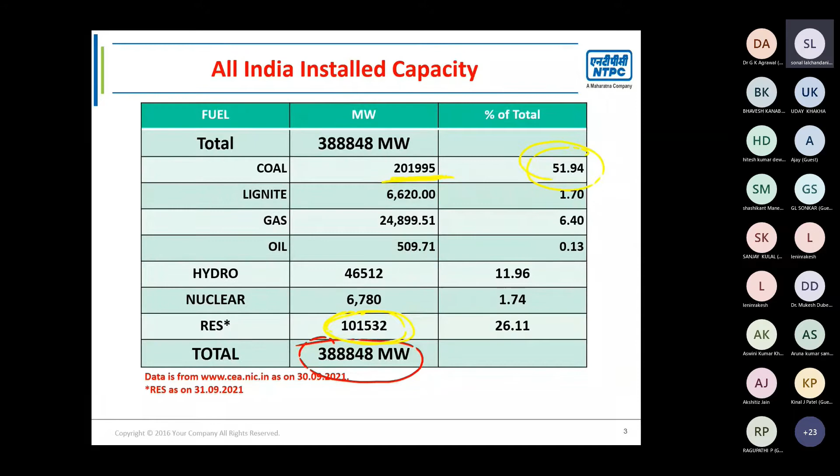And with the government of India giving emphasis on renewable energy, renewable is around 1 lakh megawatt. Jo main aapse bol raha tha that India is a rich state in terms of electricity, so our installed capacity is very very big, out of which our renewable is 1 lakh megawatt, which includes solar and wind.

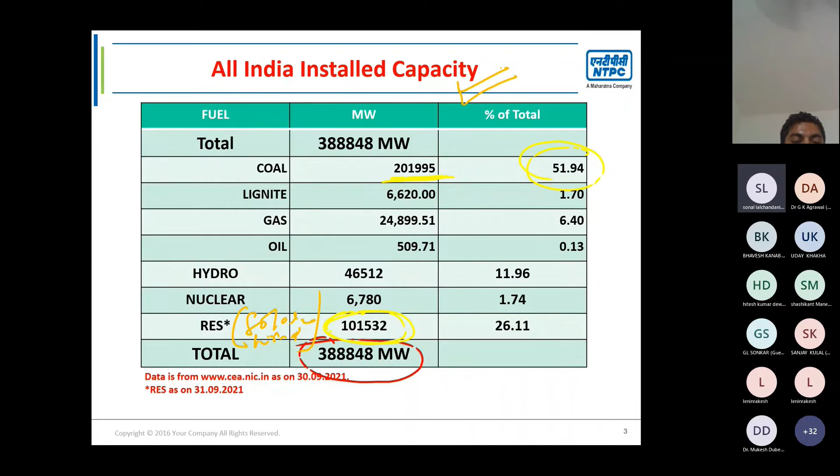It's usually a session of full day that we conduct, but I need to wind up in 2 hours, so I'll move fast. This is our renewable energy source share. Maine jaise aapko bataya that we have 1 lakh megawatt of total renewable, which includes wind, solar. Major is wind and solar. Wind aur solar major hai.

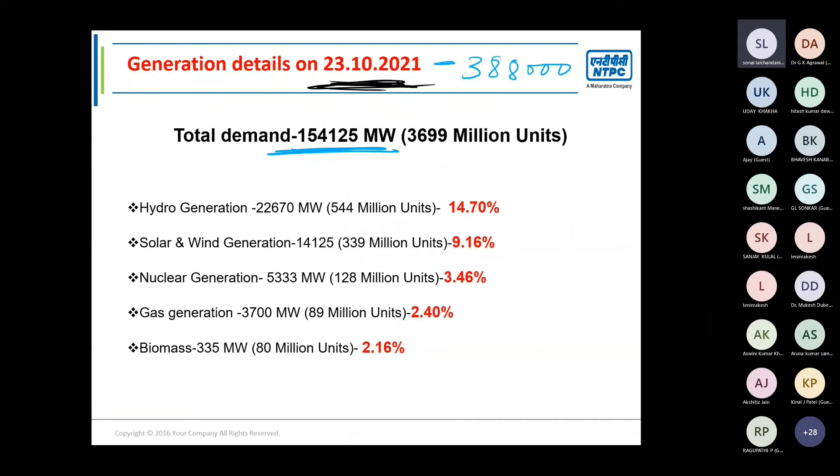Yes, sir. Am I audible? Yes, sir. 1 lakh. Yes, sir. We are using like 50% of the capacity.

So it has touched the maximum it has touched in history, which is 2 lakh. Not even 2 lakh, around 1,95,000. I am just assuming 2 lakh in the month of June.

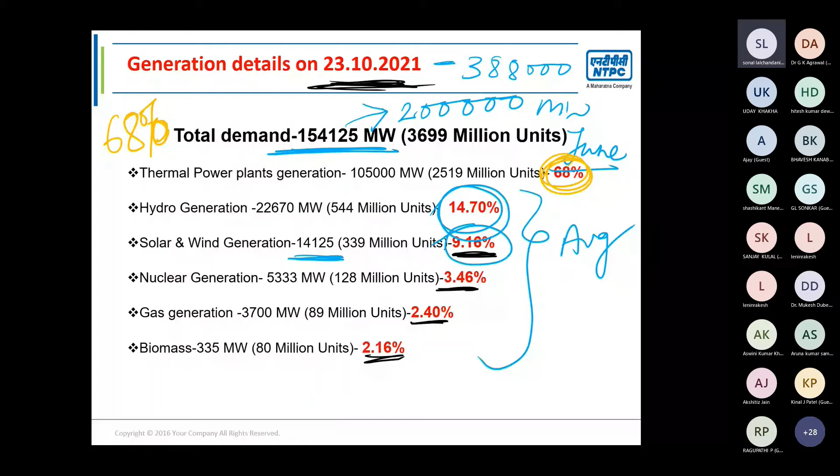देखिए मेरी जो यूनिट्स हैं, आज से 10 साल पहले या 50 साल पहले जब भारत आजादी के बाद सोचा कि हमें अपनी बिजली बनानी है, तो एनटीपीसी का जन्म हुआ। 1965 में रशिया से एनटीपीसी में टरबाइन आया, बदरपुर प्लांट की स्थापना हुई। So India started its own electricity production.

जब बिजली बनाने लगे तो जो थर्मल पावर प्लांट्स थे, they were supplying 100% of load, because the RE concept was not there. But as the transition is there from thermal to solar, जो मेरी यूनिट्स डिजाइन हैं, they were designed to operate at full load.

But now based on grid requirement, अब ग्रिड क्या है? ग्रिड जो मैंने आपको बताया RLDC, अब वो generating station को command देगा कि भैया आपको कितने मिनिमम लोड पे चलानी है।

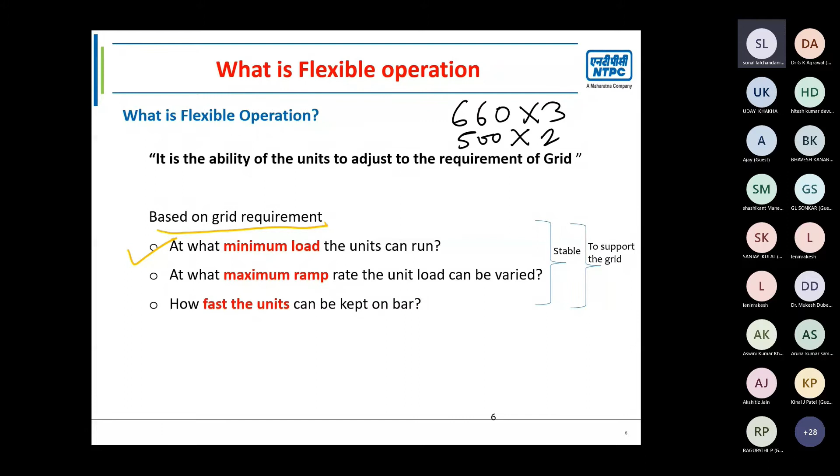बिग क्वेश्चन फॉर मी - मेरी 660 मेगावाट की यूनिट, मैंने बताया 5 यूनिट हैं, 660 की 3 हैं, 500 की 2 हैं, तो total is 2980। अब मुझे बोला गया कि मेरी जो 660 की यूनिट है, उसे फुल लोड पे नहीं चाहिए। क्यों नहीं चाहिए, आगे बताऊंगा। किस रेट पे, at what maximum rate I can make my load vary।

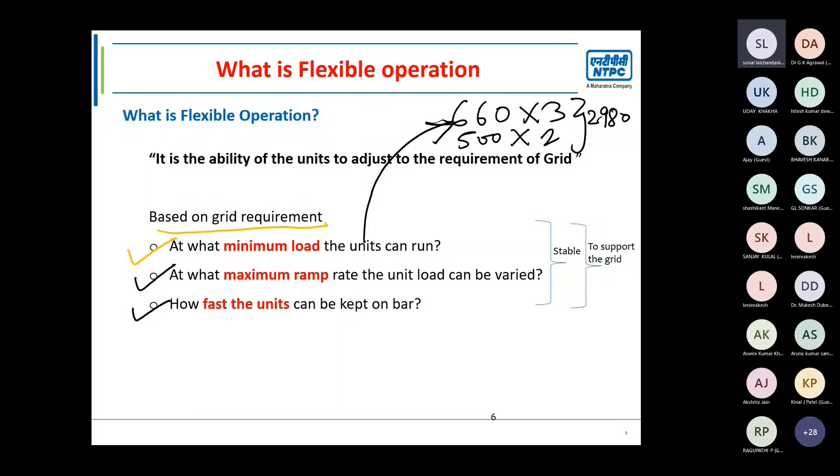हाउ फास्ट द यूनिट्स कैन बी केप्ट ऑन बार, कितने टाइम में यूनिट्स मेरे को अवेलेबल रख सकता हूं - ऐसा क्यों बोला मैंने, आगे देखेंगे।

Is it clear to all? Sir, yes sir।

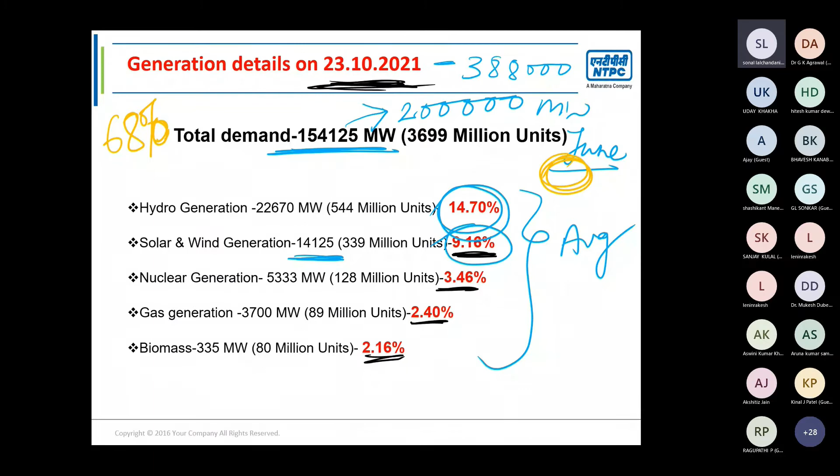देखिए डिमांड, this is the demand, this is the nuclear generation, this is the gas generation। क्योंकि न्यूक्लियर भी constant है, gas generation भी constant है, biomass भी constant है, hydro is also constant। Hydro is constant।

This is my solar plus wind। देखिए, सोलर प्लस विंड रात को 12 बजे 34,000 था। जैसे जैसे दिन बढ़ा सोलर प्लस विंड बढ़ने लगा। आप देख रहे हैं 34,000 से it touched 1 लाख। देख रहे हैं आप? Yes sir। उसके बाद दोपहर से it is at 12 hours, कम होते होते it is again this।

तो सोलर इज वेरी अनरिलायबल and solar is not constant, but we need to take solar in the picture। सोलर जनरेशन को हमें अपनी ग्रिड में लेना ही लेना है। We cannot say that we will not take solar - सोलर जितना भी जनरेट होगा हमें लेना पड़ेगा।

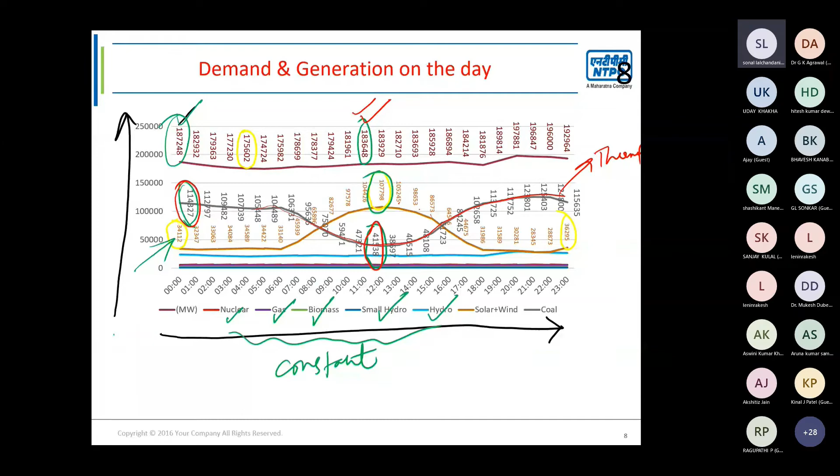Are you getting my point? What is my problem, yes? This is my problem.

Demand and generation on the day, what is our aim? How much capacity to be produced? Yes sir, yes right sir.

Yes ma'am, for one particular day, this happened on 25th June 2021. My thermal power plants, when designed by the designer, they were designed to operate at a constant load.

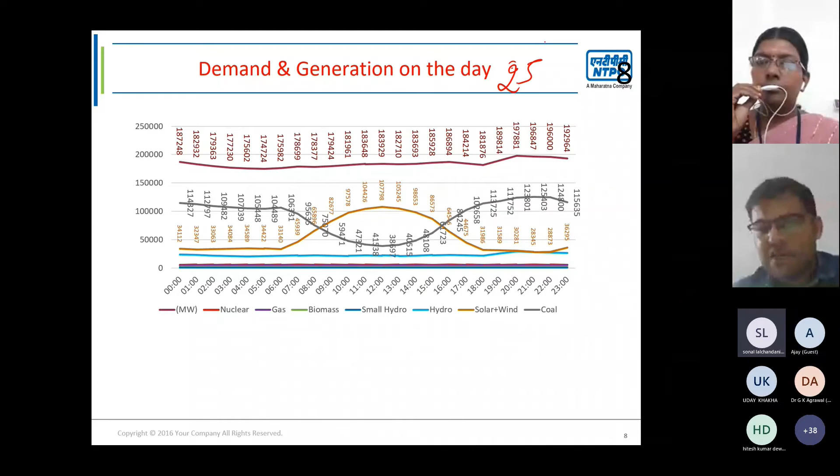They were not designed to operate below a particular load because of many factors that I will be discussing in the next slide. But since the government plan has changed, it is a mandate that we need to accommodate the renewables into the grid.

So if we need to accommodate the renewable energy, then the coal power plants need to reduce their load. So how we can do that? What is the problem?

So you can see, if you can see this slide, that highest ever generation of 1 lakh megawatt from renewable will be integrated into the grid. And the minimum generation is 38,697 megawatt. When the RE is peak, renewable is maximum, the thermal is minimum.

To meet this demand, it is maximized at this point, so it has minimum. So the thermal power plant is at this minimum. But at a particular point...

My thermal generation, this much is required in evening. You can see that at 1 hour in the afternoon, the requirement is 38,000, and in 5 hours the requirement goes to 1 lakh.

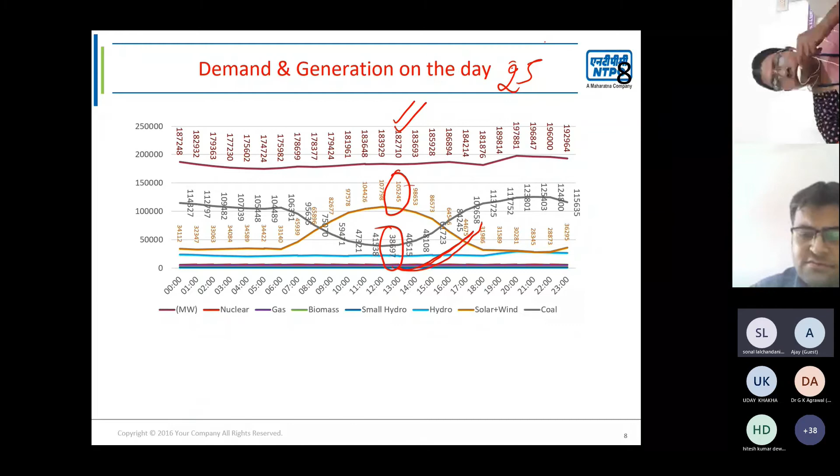So this transition in the thermal power plant was not part of the design, and those who are operating in the power plant fraternity from last 30 years, they have not seen this transition. So looking at this thing is a challenge. All the thermal power plants need to be reduced from 100% to 28% loading.

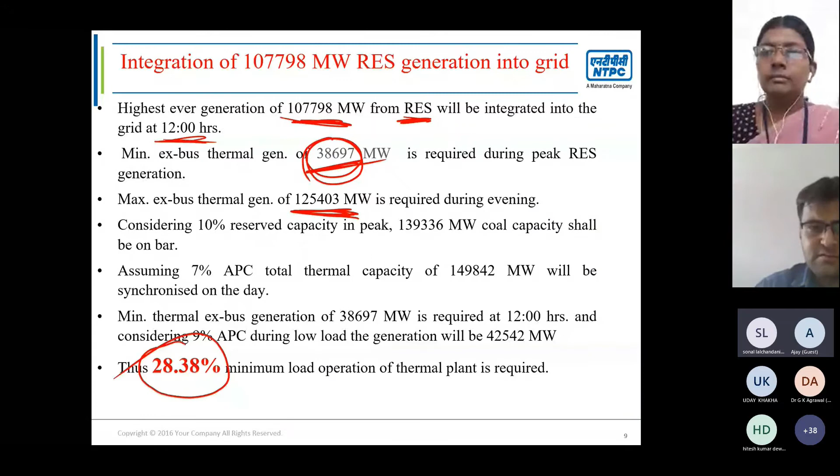See, 1,40,000, 1,14,000 - the thermal is constantly reduced, then again increased. And the thermal power plant is very difficult to operate at this much load because of high ash. Are you getting my point?

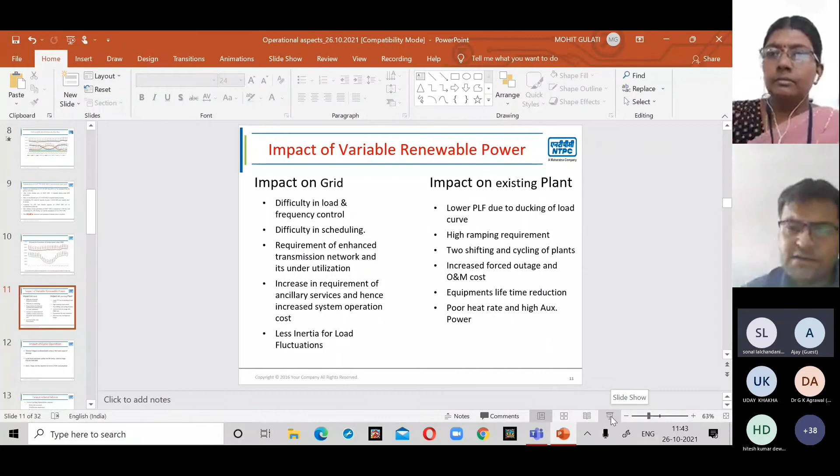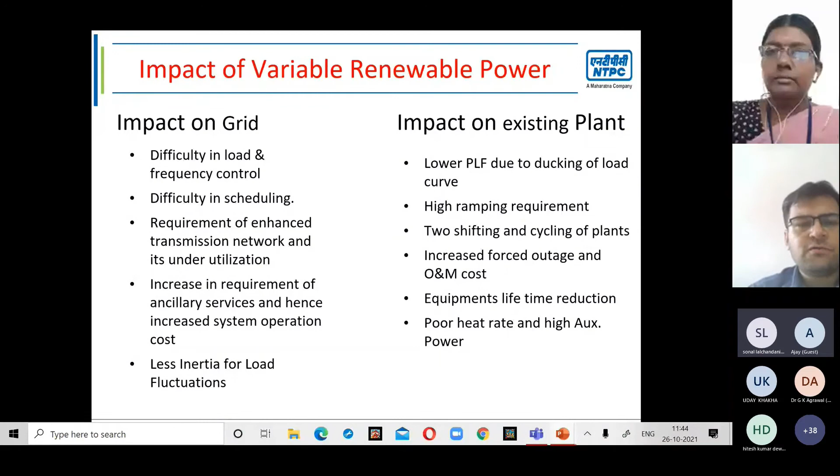So now you can see, so now...

This is the impact of variable renewable power. If the renewable is entering in the grid, then it is difficult for the grid to control. What will the grid do? Grid is difficult to control. Difficulty in scheduling, how the grid will manage?

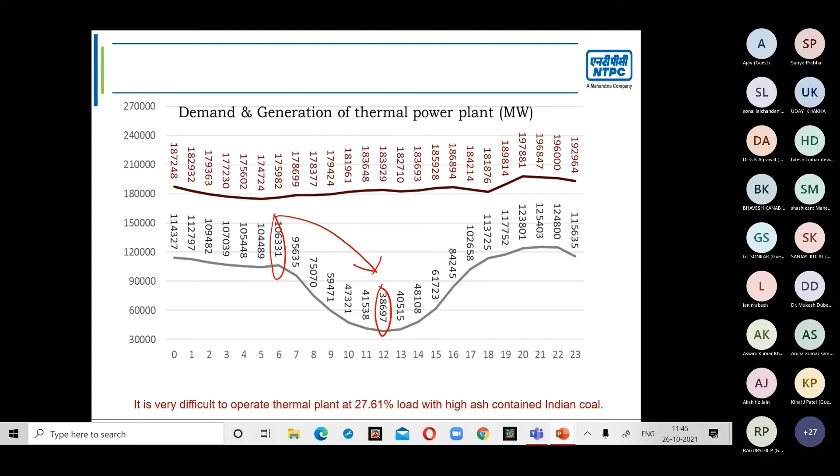You can see, at morning 6 AM the thermal power plant is supplying 1,06,000. At afternoon it has to reduce in 6 hours from 1 lakh to 38,000. So the grid has to schedule the various generating stations - you generate less, you generate more. So all this is a very difficult task.

The impact is lower PLF, high ramp requirement. The load has to be increased at a very fast rate. This results in forced outage, higher O&M cost. The unit can trip.

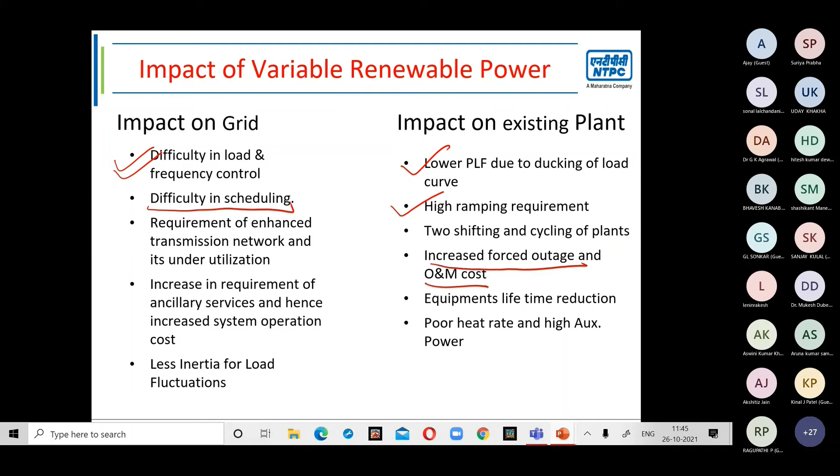There is the impact of cyclic operation. Cyclic load is there, you are increasing load, decreasing load. So there is thermal fatigue with creep. Load variations are there, temperature will rise, temperature will fall. So all these load variations are very stressful for the equipment.

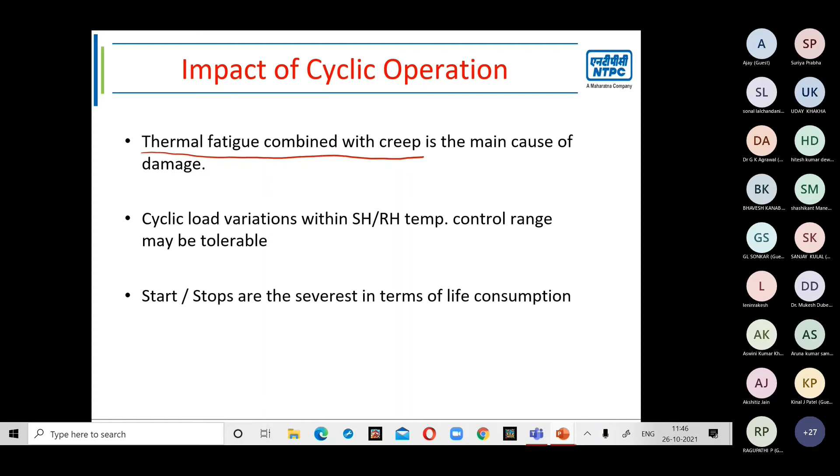A simple example: when we are going on a highway, it is always recommended to ride at a constant speed for maximum mileage. If we increase the speed, decrease the speed, there is a brake, suddenly the car stops, the mileage is less. The same is the case with a thermal power plant. If they are operated at a constant load, they will give maximum efficiency. So if they are cyclic, they have to go through all these problems.

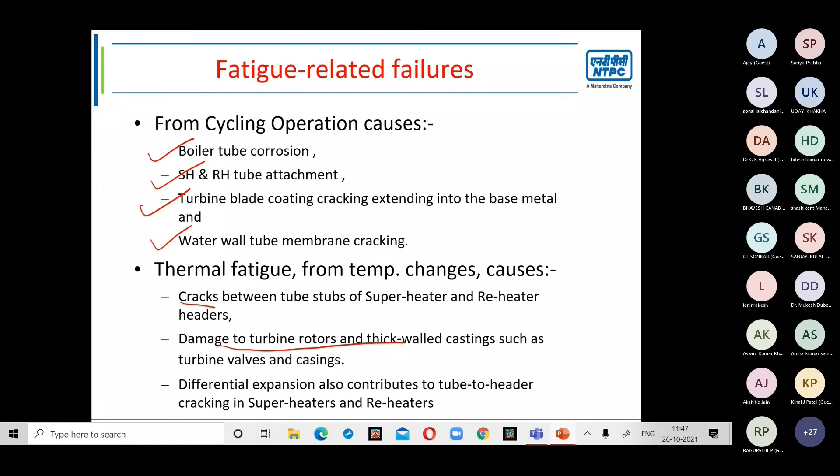Thermal stress is there. Combustion quality, as madam was saying, combustion can be poor.

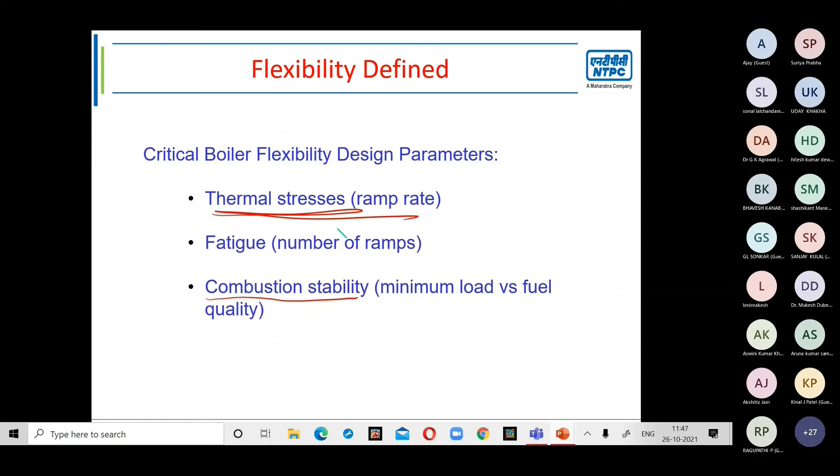This is the major challenge that we have to increase ramp rate. We are told load is low, reduce it, or increase it. So this is ramp rate, ramp down, ramp up. This is ramp down, this is ramp up.

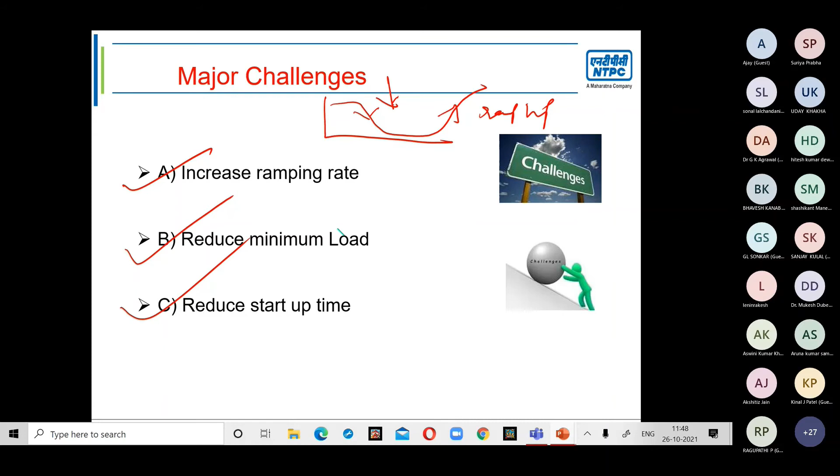Minimum load we need to reduce. Startup time we need to reduce. If a unit is tripped, we need to start it immediately. We need to cater our machines in such a way so that we can operate our power plant at minimum load.

See, if the requirement for electricity reduces and the insertion of renewable solar in the grid is maximum, then what will they tell the thermal plant? Reduce your load. And if you say you are not able to reduce the load, they will say please shut down, because the grid is the prime responsibility, not the generating station.

So for the grid, we need to maintain grid discipline. Getting my point? Grid discipline is important.

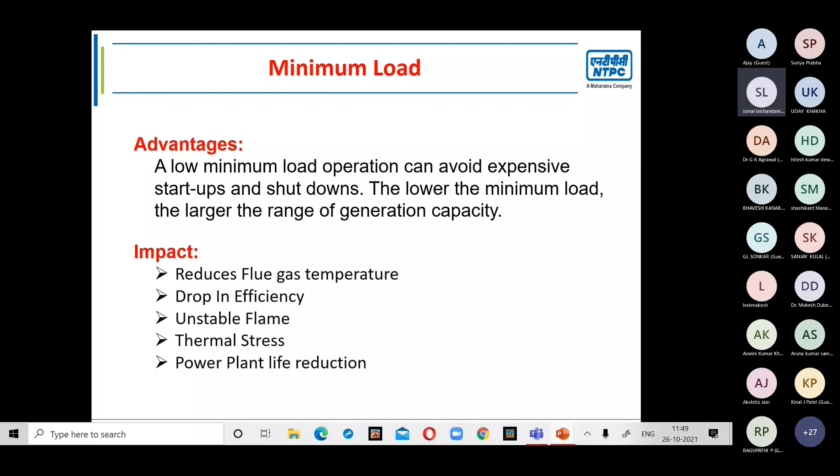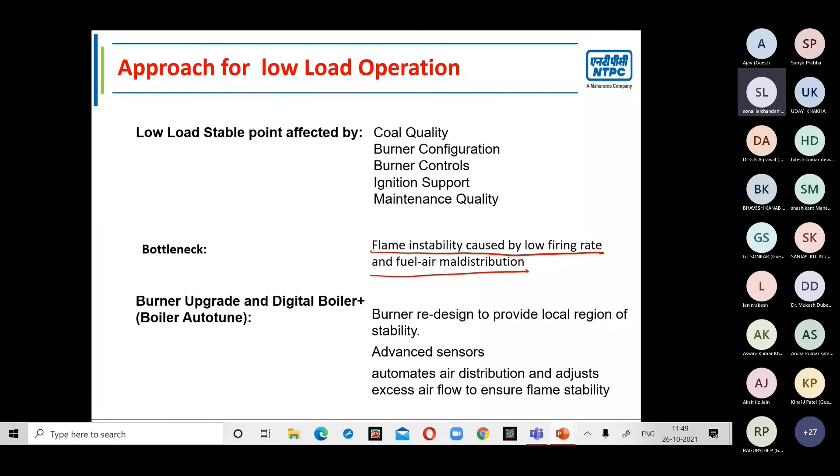Then there is the coal problem, flame instability, low firing rate, fuel-air ratio is not proper. All these things are a bottleneck, a design issue.

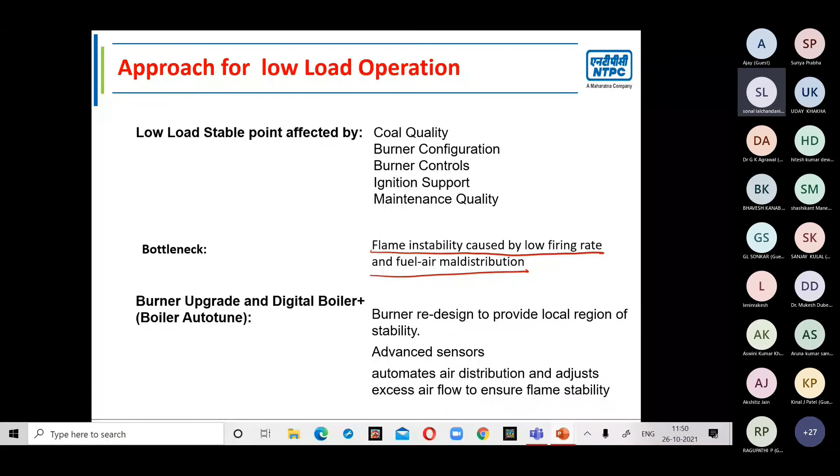If we are able to manage a higher ramp rate, it allows a power plant operator to adjust net power more rapidly to meet changes in power demand. But even if he is able to do that, which is the need of the hour, if he is doing this, then during fast ramping it is more challenging to maintain optimal conditions in the boiler — more thermal stress, excessive temperature changes.

Speed of fuel supply will be required. If load has to increase, fuel has to increase; if load has to decrease, fuel has to decrease. But are we able to cope up with that much requirement? Are our machines able to?

From childhood you told a child, you need to walk, you need to walk, you need to walk. Suddenly, when he is 50 years old, you are saying you need to run, you need to stop, you need to jump, you need to stop, you need to walk, you need to run, you need to jump. So all these things, if we need to cope up with, there has to be changes in the design part.

All the thermal power plants have been running for the past 20-30 years. NTPC Sipat is a very new NTPC plant, still it is 15 years old. NTPC Singrauli is 40 years old. Dadri is 40 years old, Jhajjar is 30 years old, Rihand is 40 years old. They were all operating at full load.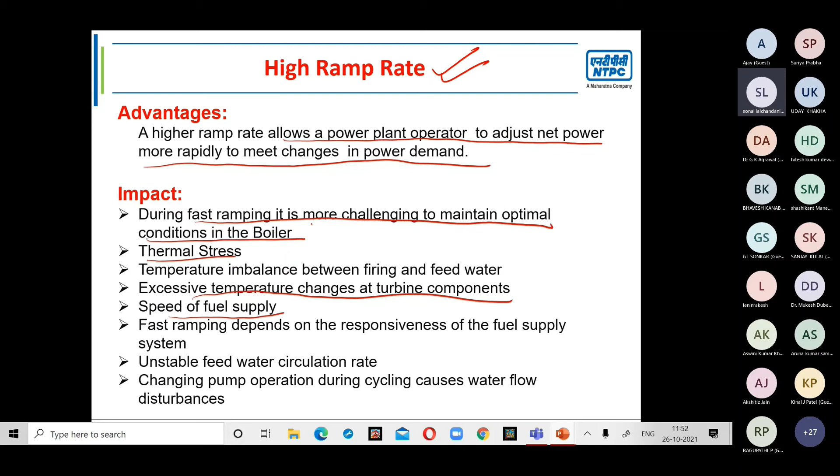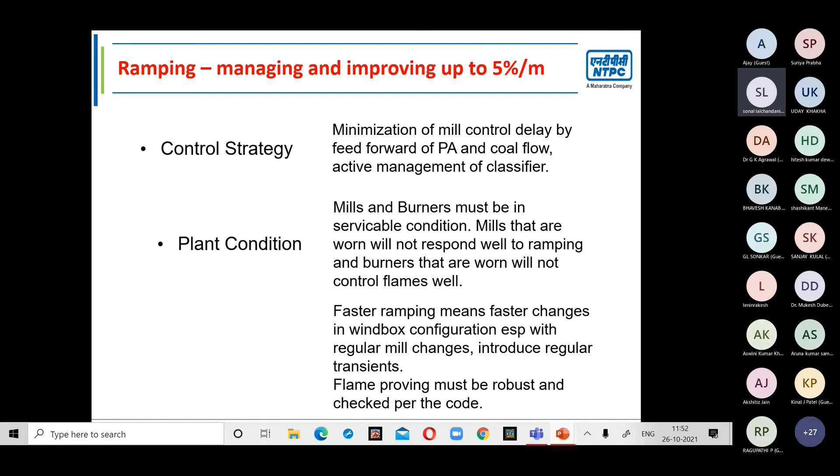We are all working in that direction. Some strategy is there — ramp up, ramp down strategy. You can go through this. Less startup time will be there. If the unit got tripped while running, it has to start early.

Because if a unit is tripped, it's fine, but as the requirement increases, the demand increases, you have to supply to the grid. So you need to make your units faster.

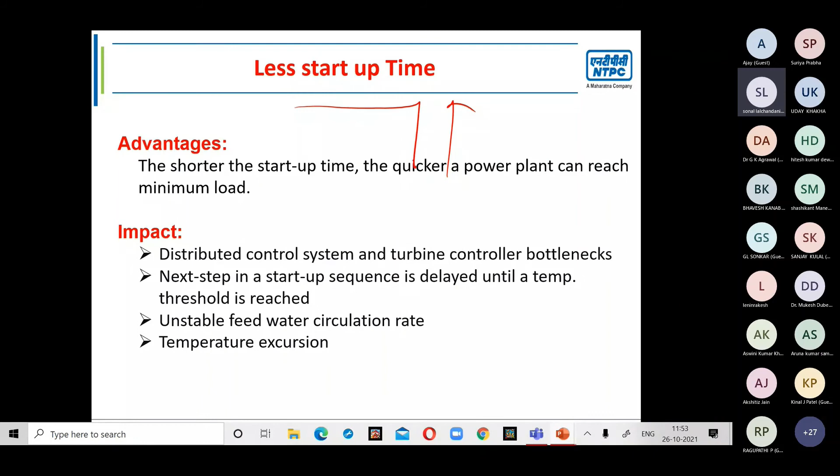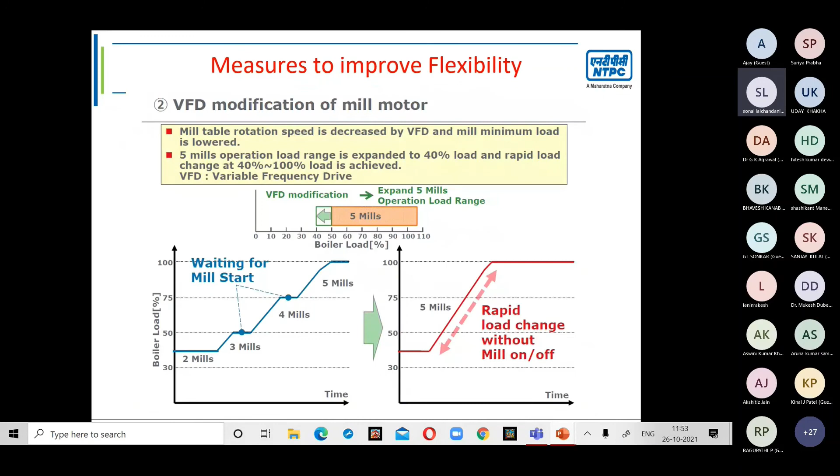I'll show one thing. One of our teams has visited Denmark. Denmark has 43% wind energy, and 60% of households are provided with heating from thermal power plants. That means the power plants there need to operate in such a way that wind is the main source, and wind is highly dynamic. You don't know which day the wind will be strong or weak. So wind energy keeps on changing.

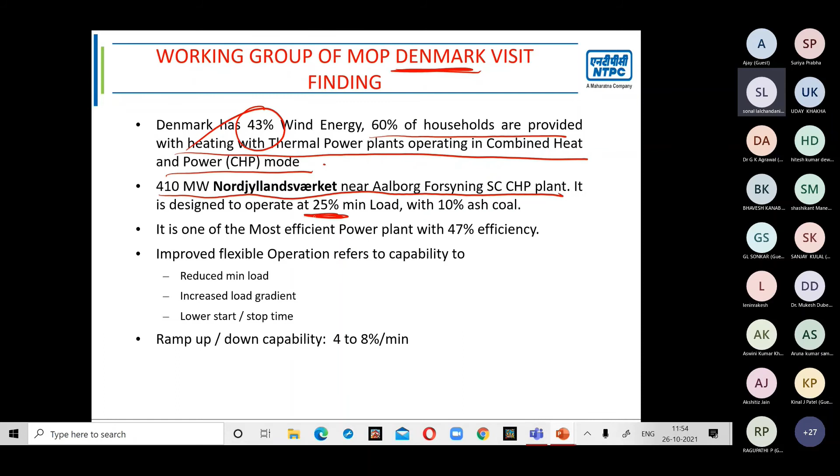So the thermal power plant of 410 megawatt is designed to operate at 25% minimum load. Here, what minimum load have we achieved so far? 55%. My 660 megawatt unit, I can currently run it only up to 330, or maybe 360. For a 660 megawatt unit, for 25% I would need to run at 150 megawatt — impossible. In the current condition it's practically impossible. Maybe in future some changes can make it happen, but as of now I would say it is practically impossible.

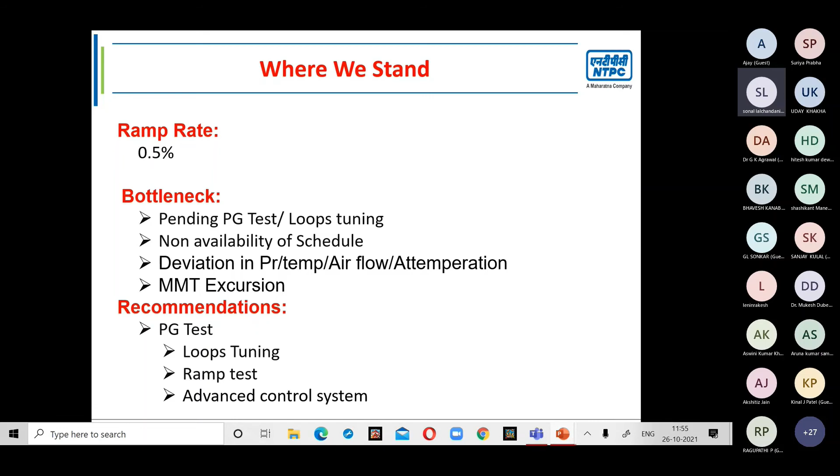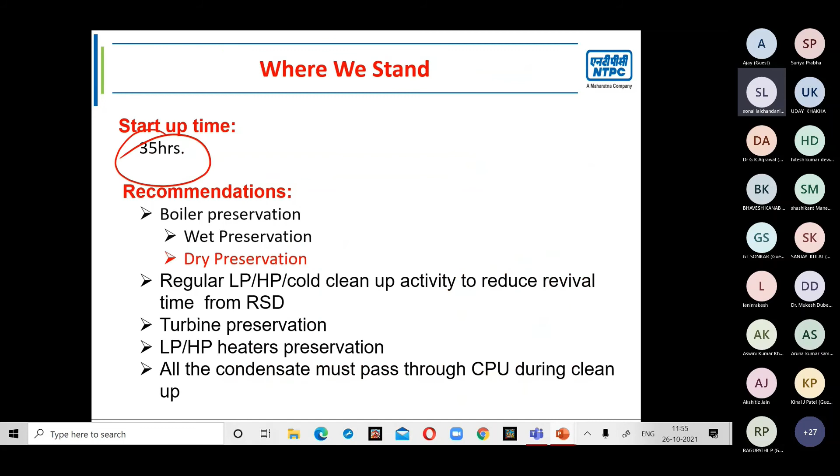And they have incorporated all those changes — it is the most efficient power plant. Where we stand: our startup time is 35 hours. If our unit shuts down, it takes us 35 hours to start the unit again. Our ramp rate is low. If they tell us to increase load, the ramp rate of Denmark is 8% per minute, ours is 0.5%. So all these are bottlenecks.

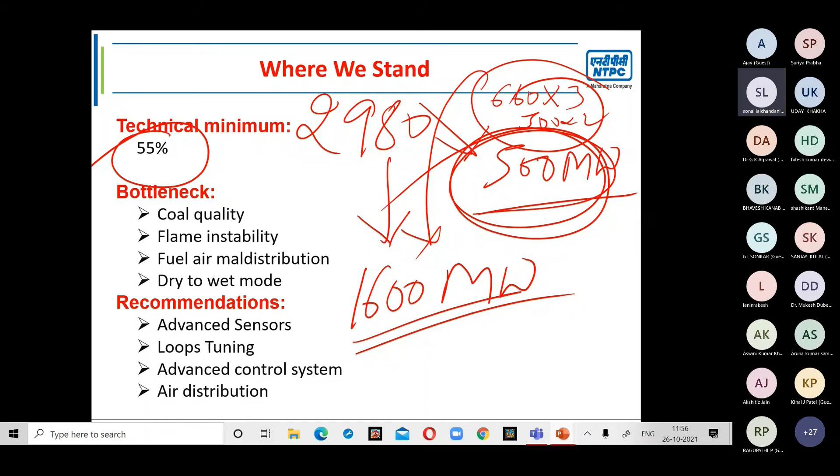Because of problems, I need advanced sensors, advanced control systems, tuning of the loops. So all this is the recommendation of the committee and we are working on it, and we have achieved from 55 to 45. We'll be happy to see that we have touched 45.

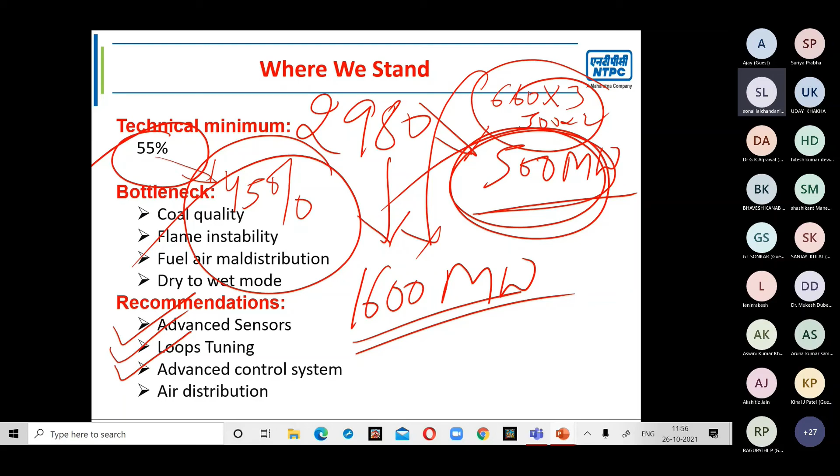So the major summary is that flexibility is the need of the hour, and boilers can be modified to increase their operational flexibility. Indian coals are challenging but suitable for flexible operations with some modifications.

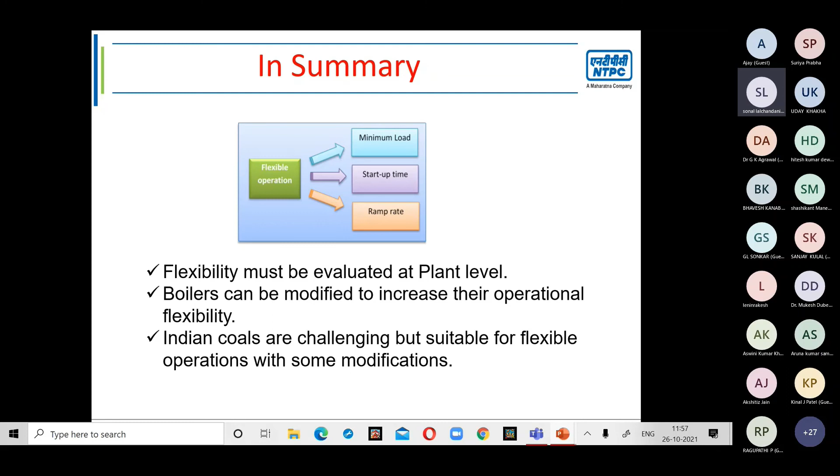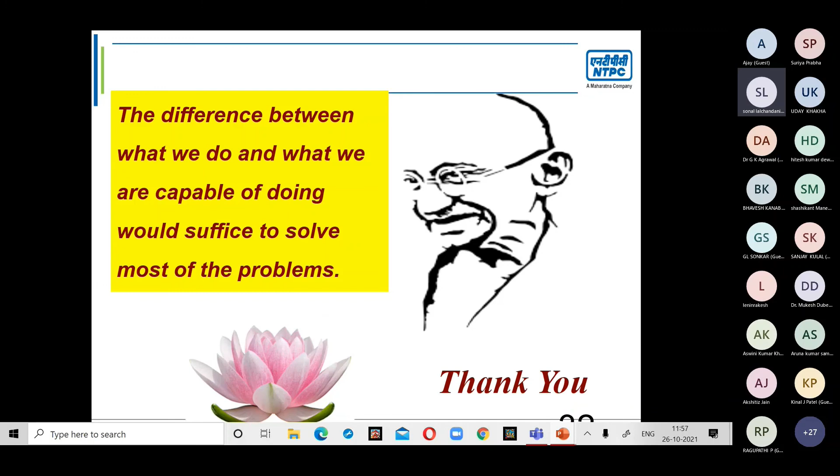The difference between what we do and what we are capable of doing would suffice to solve most of the problems. Thank you very much. If you have any queries, any doubts, you are free to ask. Please go ahead.

Sir, is there any method to reduce the thermal stresses and fluctuations?

Ma'am, the boiler or the major equipment undergo a lot of thermal stress. If we need to reduce the thermal stress, we need to work on the design aspects, material specifications. Some higher resistivity, corrosion resistant material needs to be added, use of tungsten and other alloys needs to be done.

These are all design aspects, but if the power plant is already established, some tuning of the loops is needed, so that if we are supplying coal, the air needs to be controlled in a particular way. The coal can also be modified if we blend it with some wood or biomass, and this blending can change the combustion process. All these things are under implementation in the design phase, and with this tuning of the loops and changes in the burners, we have managed to go from 55 to around 50-45%.